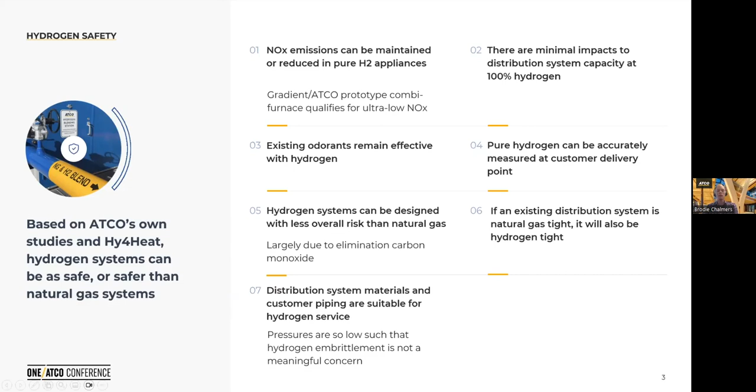Distribution pipeline system materials are compatible with hydrogen. We actually have tested all CSA B149 materials and have found that there are no issues with hydrogen compatibility. Of course, this does not obviate the need for an engineering assessment to ensure compatibility with the introduction of hydrogen, but there's no showstoppers or large-scale replacements that we anticipate would be necessary to facilitate hydrogen distribution.

Now, this is the risk slide. It's important to note that 95% of the risk associated with using natural gas for space heating today is associated with carbon monoxide. This is particularly true here in North America and Alberta, where we use forced air heating and where carbon monoxide can potentially be pushed through a premises due to ducted forced air heating.

With hydrogen, we eliminate carbon monoxide entirely as we move to 100% hydrogen. And while hydrogen does have a wider explosive limit and lower ignition energy, this can be mitigated with appropriate engineering controls such that the overall risk is reduced in hydrogen service.

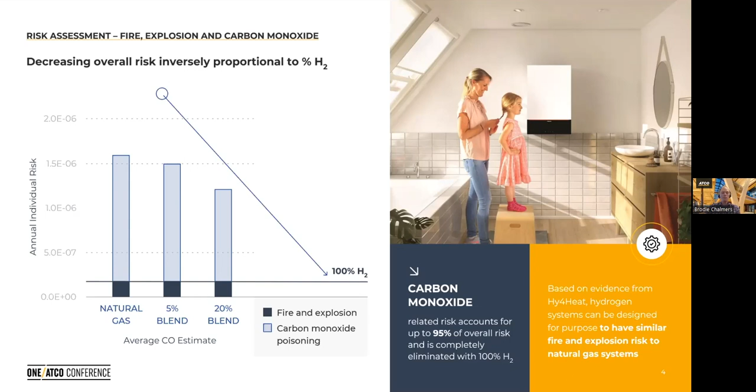Both of those are energy units, but I do think we have some confusion around, for instance, megawatts versus megawatt hours in the electricity system. So just a quick refresher on some of the basics.

So velocity is distance over time. So, kilometers per hour, meters per second. Acceleration is velocity over time, or meters per second squared. Force is mass times acceleration, or kilograms times meters per second squared. This is also known as a Newton.

Work, which is also energy, is force times distance, or Newton meters, also known as a joule. So a GJ is a billion joules. And then power is energy divided by time. So Newton meters per second, or watts. And this is why we need to take kilowatts and multiply it by hours to get to kilowatt hours to get back into an energy term, which is time independent.

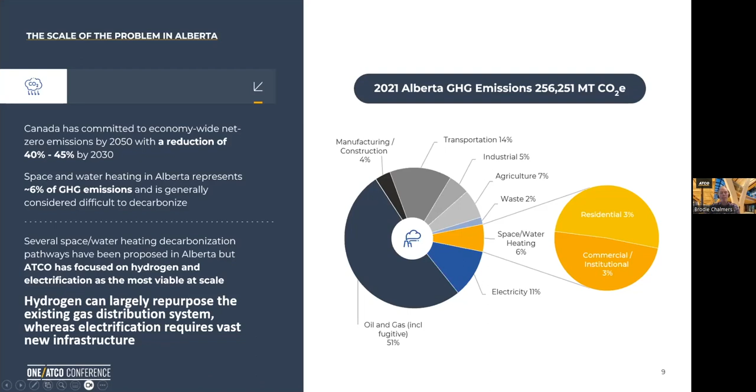All right, so some assumptions that went into this study. I think there's a lot of organizations that have looked at space heating and suggested that electrification is the optimal pathway. But what we found is a lot of these studies stop after electric transmission. And they don't look at electric distribution at all. And unfortunately, that is where the vast majority of the costs enter into the equation in Alberta.

Now, we know that Alberta's electric transmission system is really quite strong and there is some excess capacity. While we would have to build incremental transmission to support space heating, it's not nearly to the same degree as the distribution assets that require reinforcement. For this reason, I've held transmission costs roughly where they are today at 4 cents a kilowatt hour.

We've used an assumption of 2.2 for annual heat pump coefficient of performance, and heat pump coefficient of performance under peak demand of 1. Now, there are heat pumps today that can do a little bit better than this. It's not really a matter of whether they work or not. It's more a matter of whether they can deliver adequate energy on the coldest days and what the consequences are for the electric grid.

We've assumed an average furnace fleet efficiency of 85%, and I've assumed that hydrogen space heating would occur at that same 85%. In reality, this would probably be pushed closer to 95%, given that it would be newer appliances that would be deployed in hydrogen service.

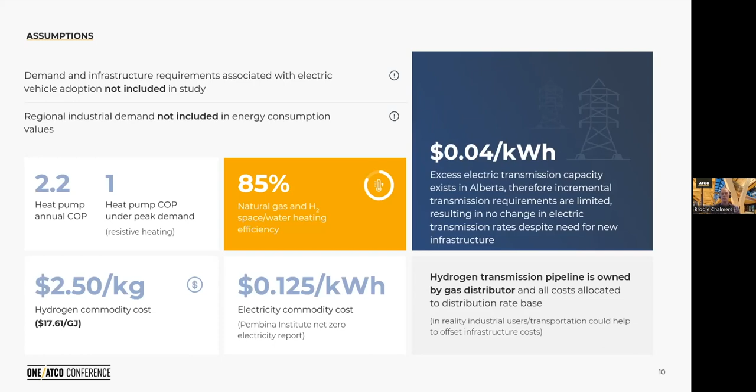Electricity supply. So this is really important. This has become a bit of a hot button political issue recently. I'm not going to opine on the politics of all of this. I will just simply present data.

It's important to know that wind and solar, more than they are intermittent, they're actually reliably absent when they are most needed. So I've said before that wind and solar are a bit like the Toronto Maple Leafs of the energy system: solid regular season, but typically out early in the playoffs.

And so what you see here is that when it's between -30 and -35, the highest ever measured wind capacity factor is about 7%, typically about 5% of installed capacity. Solar, even worse than that. And this is partly due to the short sunlight hours and the angle of the sun at that time of year. But also, evidently, there are other issues that seem to be preventing the sun from reaching solar panels during these periods of time.

Now, we might say that, well, we can install batteries to deal with this, and I would say that that's highly unlikely, given that 1 day of space heating in Edmonton would require about 220 gigawatt hours of electricity. For the whole province, space heating would be close to 700 gigawatt hours of electricity. And in 2022, global EV battery production was about 550 gigawatt hours of batteries to support EVs. So, to support the province for a day, we need more than 100% of global EV battery production.

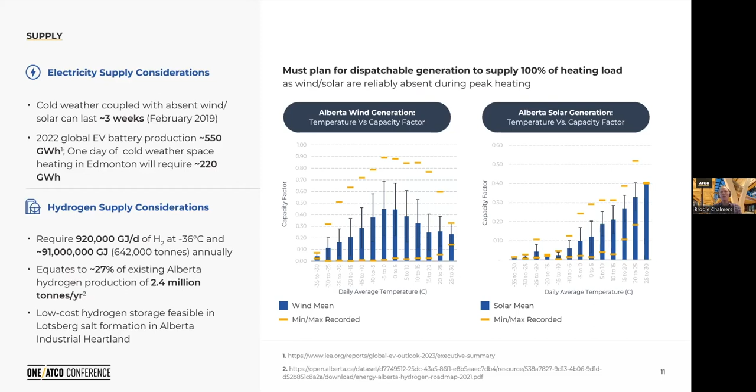One of the arguments you hear is that, well, when our renewables aren't producing, what we really need is more interconnections to other jurisdictions with strong renewables or hydro resources, BC being a strong focus of that argument. We know that BC is making significant strides towards electrification of space heating. And given the warmer climate in the Lower Mainland, you get higher COPs and better heat pump performance.

But what we see here on the right is that a cold day in Vancouver is almost without fail a cold day in Edmonton. Electric peaks also occur almost identically on the same hour in the two jurisdictions. So if you were to plot BC electricity consumption in February 2019 over top of Alberta electricity consumption in February 2019, both jurisdictions hit a new peak consumption in the exact same hour, even taking the 1 hour time difference into account.

So what this means is that to the extent we see electrification of space heating in BC, there's just simply not going to be any electricity from BC to import into Alberta when we need it most to facilitate our existing electricity peak and/or a space heating peak.

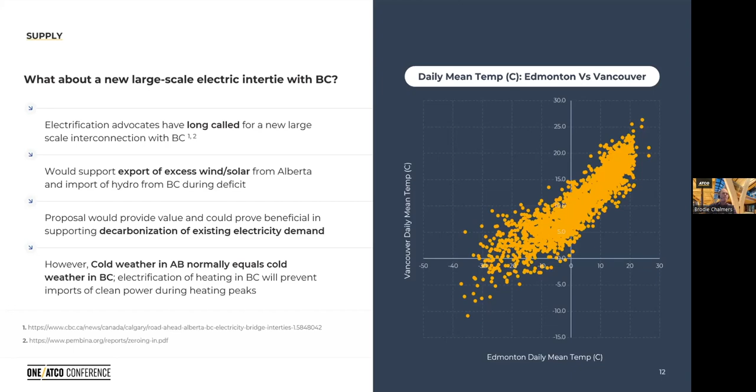So on the demand side, Edmonton distribution heating peak is about 920,000 GJs a day, which is equivalent to about 256,000 megawatt hours a day. The peak electric heating requirement for Edmonton would be about 9,100 megawatts after accounting for the improved efficiency of electric space heating. That's about 93% of existing average day electricity demand, or 75% of existing peak day electricity demand in all of Alberta, including grid connected industry. That's not just residential electricity consumption.

The annual electricity heating requirement for Edmonton, however, is just about 9,800 gigawatt hours, or only approximately 11% of total existing annual generation. So you're starting to see the problem here. What you end up doing is designing an electric system to accommodate a peak day with very poor utilization. What that does is it drives up rates. It drives up the cost of delivery because utilities have a revenue requirement that needs to be paid.

So on a cold day, residential space heating demand is about 66%, and commercial space heating demand is about 34% on our gas distribution system, which is true for Edmonton as well. And this is how our distribution revenue requirement is divided. It's about 70% residential, 30% commercial. And that's because peak day drives facilities, and facilities are what are paid for in delivery charges.

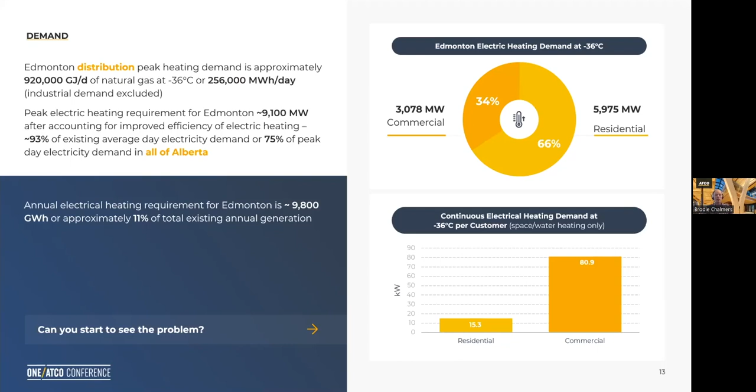And I guess the other thing I should mention here too is this isn't like EV charging, right? I actually have an EV. I charge in a 30 amp circuit at just under 6 kilowatts. That covers a commute in sort of an hour and a half, 2 hours. It's easy to stage charging through the evening and night so that your electricity demand doesn't necessarily spike when everyone gets home from work. This isn't something you can do with space heating. Space heating is all on, all at the same time. And when it's 35 below, there's just no staging that can be done to deal with this.

So just a quick aside, total ATCO gas demand. I've got the COP curve here for the best in market heat pump that we've been able to identify thus far. It's a Tosot Apex unit. A lot of these are being installed in Edmonton today, most in conjunction with a gas furnace for the colder days, but there are some off-gas installations as well.

What you see, I don't know if you can see my cursor here, but this is actual gas consumption data converted into electricity. So basically what we've done here is taken the gas consumption and multiplied by 0.85 to show you what electric demand would look like if all space and water heating demand in the province were electrified. And as you can see here, we're looking at roughly 27 gigawatts in December 21, 2022 would have been needed to supply space heating. And all these white areas here represent unutilized or underutilized capital. And what that turns into is delivery charges.

So the existing peak is about 12.1 gigawatts. These are actually averages, but what you can see here is that existing electricity demand peaks coincide with space heating demand peaks already, and then this will just be further magnified by electric space heating at scale.

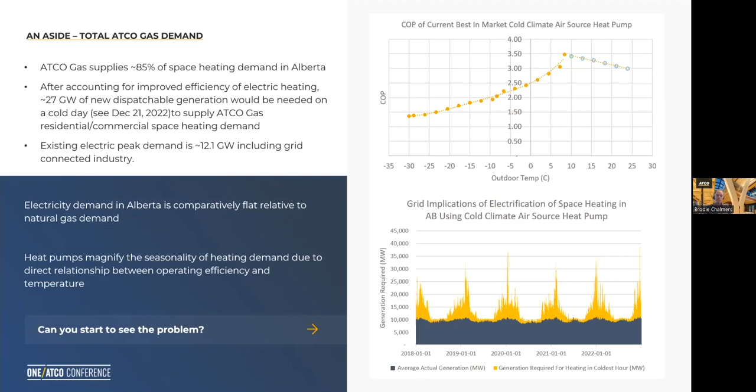So on the residential side, I think it's been widely acknowledged that space heating costs at the customer level will be higher in an electricity system than in a hydrogen system. It was confirmed in a recent UK report from the National Infrastructure Commission as well. These costs are probably low. I mean, I think NRCan says the cost of a heat pump installation in Canada today is about 18,400.

The recent increase in the heat pump rebate for those converting from oil heating has shown that $10,000 is probably low. It's likely closer to the $20,000 mark. An air source heat pump hot water heater would be necessary, and then a panel at about 2,500. In contrast, at the customer level, a new furnace installation is really all that's necessary.

And we anticipate that the hydrogen combi furnace we've developed in partnership with Gradient could be installed in this $9,000 range. I actually have a natural gas version of this furnace in my house, and I can say I didn't pay $9,000 to have it installed.

The other thing I'll say at the customer level is disruption from converting to hydrogen is likely quite a bit less, given that there will be, especially in developed basements, a lot of wire pulling. I mean, I can tell you when I put my EV charger in, I had to have electricians fish wires through a full developed basement because my electric panel is actually on the opposite side of the house from both the mechanical room and where the charging occurs. So there's just a lot more interference in people's homes in this electric scenario.

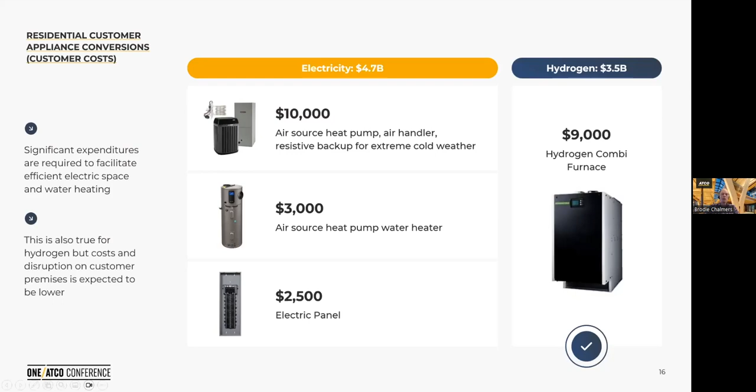On the commercial side, again, panels will be necessary, and air source heat pumps that would do space and water heating is what we've assumed here. These costs are a little looser. We've just basically 10x the costs from the residential side, where we're a little more confident on what the costs would be. But again, you can see the electricity costs are estimated to be higher here.

How these conversions would be funded isn't clear, but I will say that by 2030, with $170 carbon tax, ATCO Gas will be collecting roughly $2.4 billion a year from gas distribution customers in the province, which is more than adequate to start paying for some of these costs.

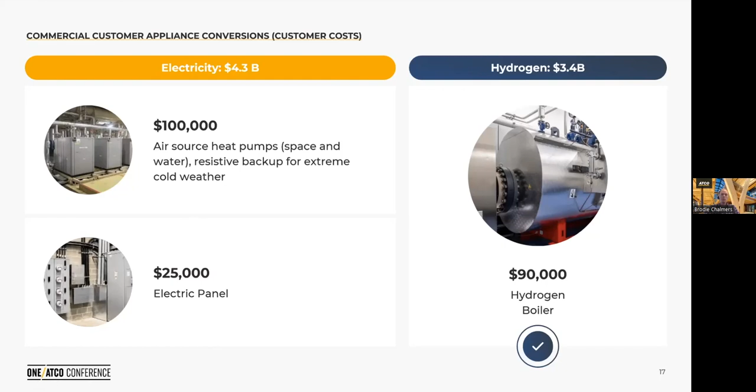So this is where the big costs come in. This is electric distribution infrastructure. So we've assumed that 75% of service lines would have to be upgraded to accommodate electric space heating. In Edmonton, EPCOR's practice has typically been to install 100 amp services. There are some 200s, but the vast majority are 100.

Distribution circuits to deal with the voltage drop associated with a sort of 5x increase in coincident demand. You're going to need to loop or replace existing circuits. So I'm not suggesting you put in 5 of them. I'm saying you'd put in one, and it would be a larger diameter and would be able to carry more electricity. Now, these costs could be mitigated to some degree to the extent that circuits in the region are in conduit. And certainly overhead lines would be less expensive to replace. I've assumed this is all undergrounded, direct buried.

But I would argue that if you're relying on electricity for space heating, you'd likely want these circuits underground for reliability and resiliency reasons. Transmission, just 400 million, given that transmission is strong in the province. This is not a hard number. This number could very easily be quite a bit more, but we've assumed that it's modest at this point.

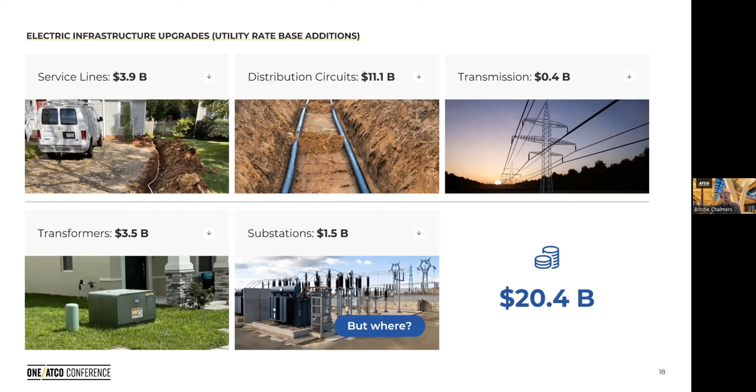Substations, really all existing substations would require upgrades, but we would also have to build a number of new substations in the region. And these numbers here, 1.5 billion, I've assumed that we would be able to acquire land relatively easily. In reality, I'm not sure how easy that would be, nor are we sure where these substations could be feasibly located, particularly in built-up parts of the city.

On the hydrogen side of the equation, we've proposed a hydrogen transmission network in the transportation and utility corridor connected to a number of large pressure letdown stations. These pressure letdown stations are actually easier for hydrogen because of the negative Joule-Thomson coefficient for hydrogen. It actually warms up a little bit when the pressure is cut rather than cooling down like natural gas. So we don't need line heaters anymore. That makes these stations quite a bit less complex than what we see in natural gas service.

So we assume just $100 million here for stations. There's 11 of them in total in this plan. We do believe we will need to reinforce gas distribution system capacity, and we've put $500 million at this today, but further modeling will confirm the number. I actually expect it will come in at less than $500 million.

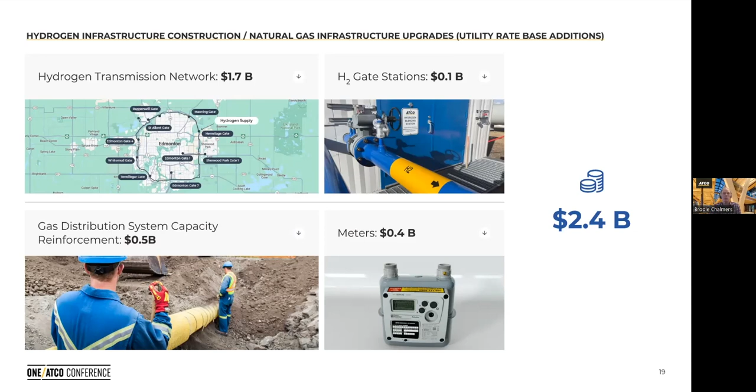We would need to replace meters at individual properties, and this number comes out to about $400 million for the residential and commercial customers combined. So, you hear a lot about, well, how would you go about converting all these customers to hydrogen? And I think it is achievable. It's very similar to what ATCO has been involved with in the past with a meter move program, where we went in and moved meters from the inside of people's basements to the outside and above ground. We did this street by street, neighborhood by neighborhood for a period of time about 20 years ago.

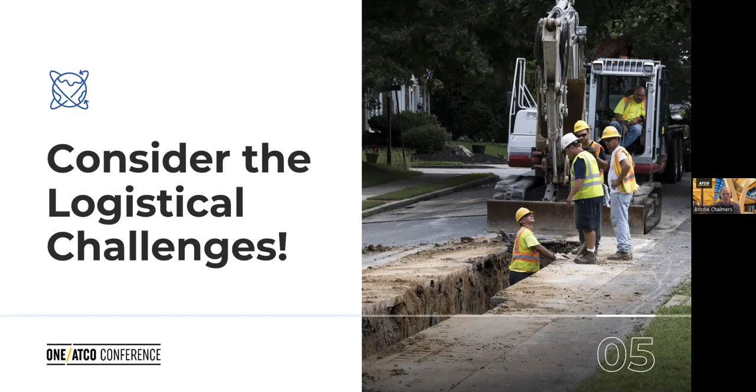On the other hand, a lot of these electric circuits that need to be reinforced are just simply going to require digging, road closures. Now, granted, some of these wires may be in boulevards and not be quite as intrusive as this. Nevertheless, these disruptions to the public will inevitably be significant. So capital costs and rate implications overall, that's what comes next.

So overall, electric system upgrades, including appliances to facilitate electric space heating in the region, just about $30 billion, whereas for hydrogen, it's roughly 10. Note, however, that the utility rate base additions for the electric side are about 20.4 billion, whereas the utility rate base additions are about 2.7 billion in the hydrogen case. Now, keep in mind that EPCOR's rate base today is roughly $2 billion. So this is about a 10x increase in EPCOR's installed rate base.

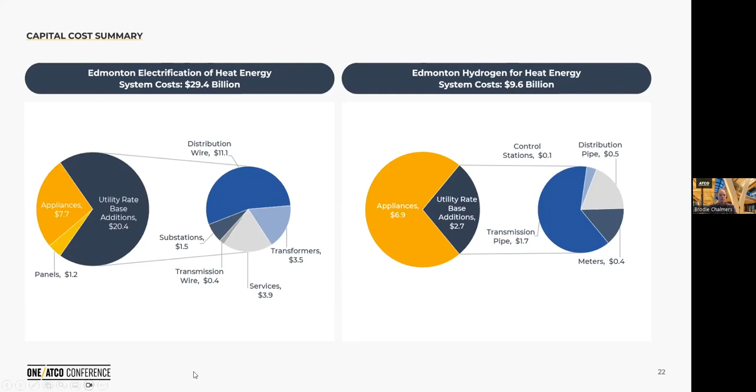Some of the economic assumptions that went into this study. I've used Alberta Utilities allowed equity thickness of 37%, 8.5% return on equity, and 5% return on debt, straight line depreciation over 50 years. I've assumed that EPCOR's O&M doubled despite a roughly 10x increase in rate base. In hydrogen, I assumed about a 10% increase in O&M. It's about $50 million, given the limited incremental infrastructure. You got to remember too that ATCO's rate base is for the whole province, and this is infrastructure installed just in Edmonton.

Existing electricity revenue requirement was maintained at 50-50 residential commercial. However, the space heating additions to the rate base are split at 70-30, just like we have in the gas distribution system today. Hydrogen infrastructure is split 70-30 residential commercial, just like the gas system. And this is defined by peak day, as I mentioned earlier. Revenue requirement is assigned to customer groups on a dollars per customer per year basis. So, what you end up with here is because your electric distribution costs become so high, the utility has to collect that revenue.

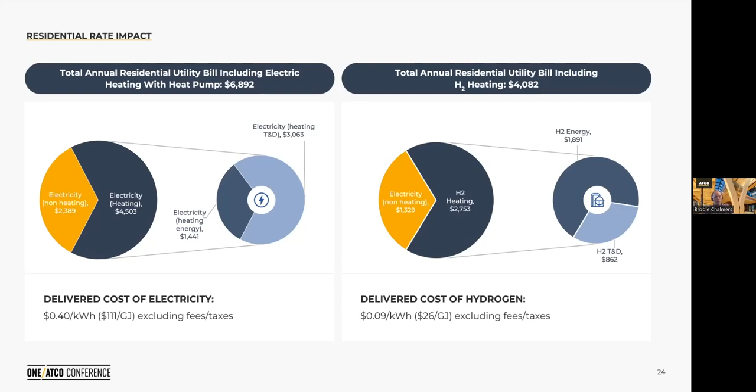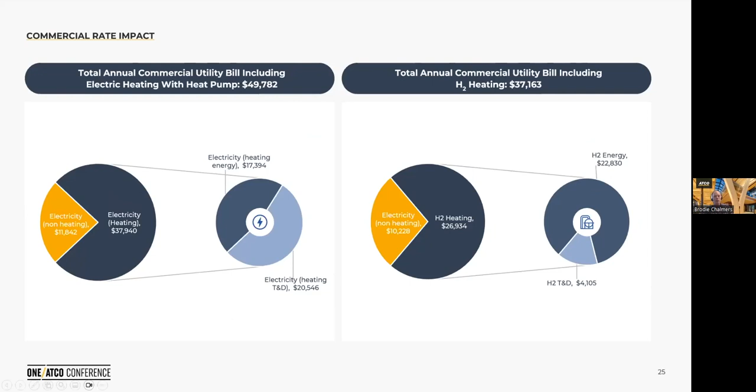Electric vehicles. So we didn't consider EV charging in this study. That would be incremental electric.

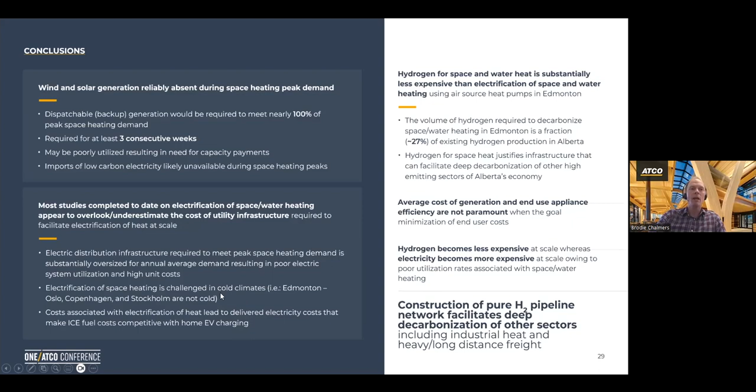So in conclusion, I won't go through these in detail given the time constraint. I've really been through this already in my talk. One point I want to make here, though, is you often see people say, "Oh, well, there's lots of heat pumps in Scandinavia, Denmark, Norway, Sweden, Finland," and if you actually look at the climate in these places, it's not cold. The coldest temperature ever recorded in Stockholm, in Oslo, is like -23 or -25, something like this. These climates are actually a lot more comparable to Vancouver than they are to Edmonton, so it's not really a valid comparison. So that's the only thing I would add in conclusion.